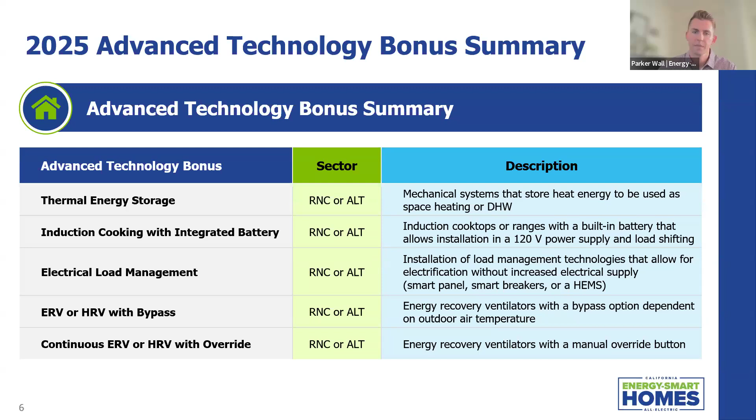These all have incentives that will be paid out on top of the base incentive for eligible equipment and eligible projects participating in Energy Smart Homes. The bonus incentives can be seen here. They vary from single-family lot to multifamily unit and ADUs. The ERVs and HRVs are only available for single-family or multifamily units, not in ADU.

If you have any questions, please reach out to your project representative, and we'd be happy to calculate what your incentive could be if you're considering installing some of these advanced technology bonuses or wondering if the equipment you're going to install will qualify. We'd be happy to sort that out for you and assist you in that process.

There is a note here: an additional bonus is available for projects keeping their panel at 100 amps or less and participating in the electrical load management advanced technology bonus. This bonus is paid out for projects that are electrifying their dwelling unit, ADU, or single family home without upgrading their electrical service. It's $1,000 per single family lot, and I believe $500 for multifamily unit and ADU.

That is shown on the screen, but that money is available for projects that are electrifying without upgrading their service. We are definitely interested in how these projects are achieving that—going forward with installing heat pumps and other electrical end uses without upgrading their electrical panels. It's good for the grid. It can avoid costs and also avoid additions to timeline and scheduling with upgrading the electrical service to the home. So we are providing an extra incentive for homes that are looking to electrify and keep their panel at 100 amps or less.

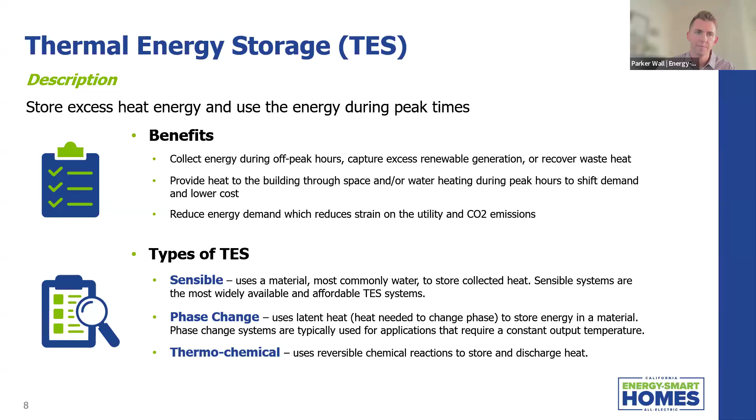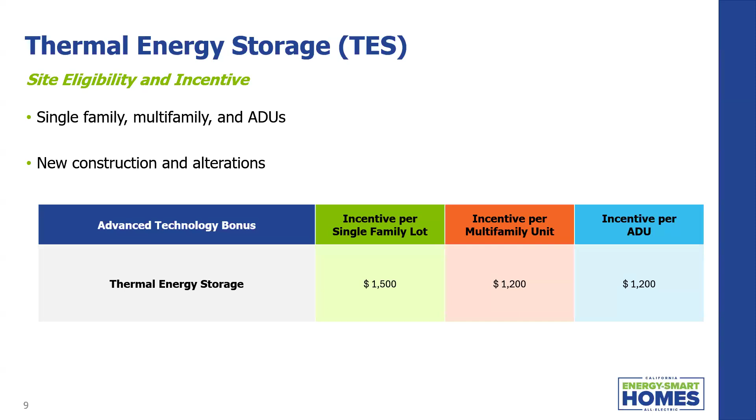Parker, we have a question. Will this TES Advanced Technology Bonus cover heat pump domestic hot water with hydronic space heating? Good question, that feeds in well to the next slide. Excellent, yes it does.

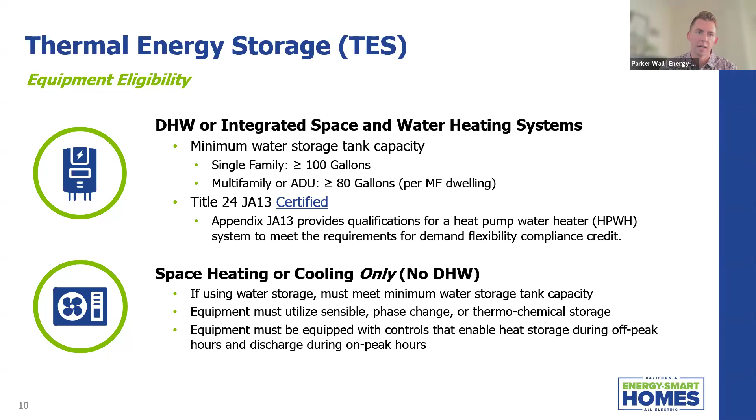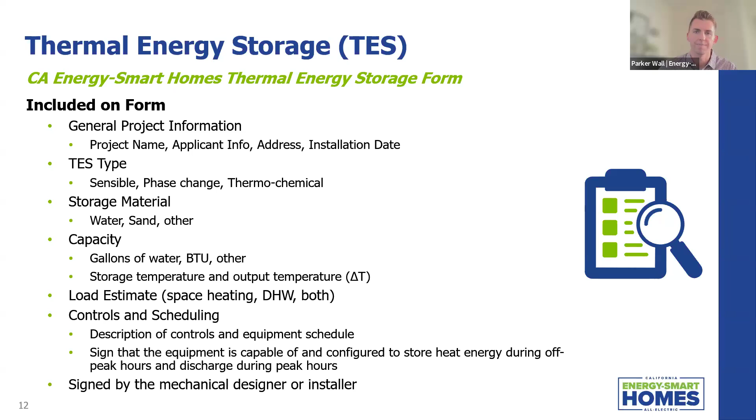So if you're interested to learn more, we'd be happy to connect you with some resources out there that have more information on this technology.

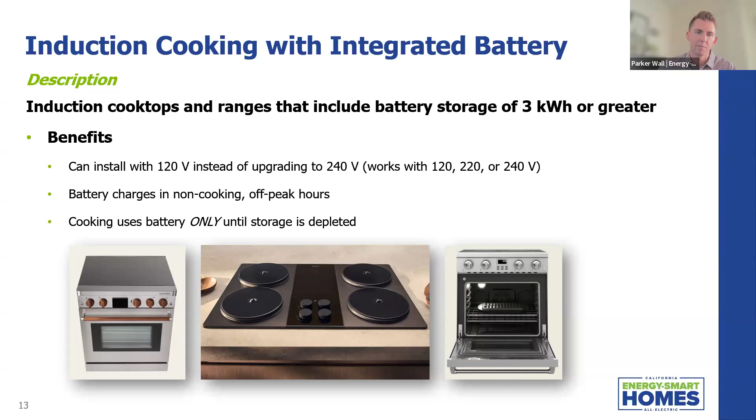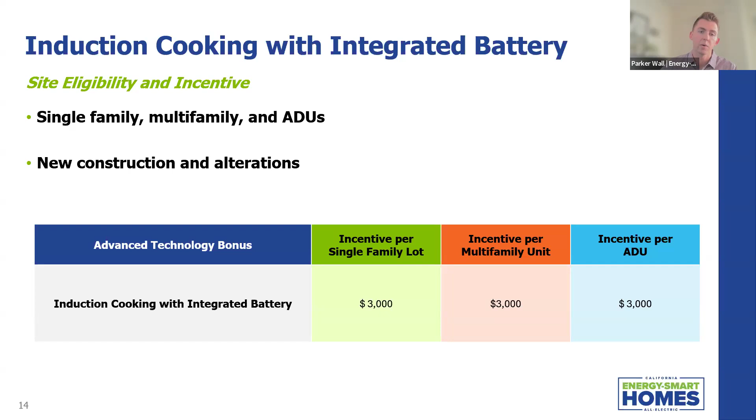Site eligibility incentives, again, eligible for single family, multifamily, and ADUs, and also eligible for new construction and alterations. Here's an overview of the incentive level: $3,000 per single family lot, multifamily unit, or ADU. So any project that applies and is eligible for Energy Smart Homes and installs one of these pieces of equipment can collect a $3,000 incentive toward this piece of equipment.

The eligibility: the equipment cooktop must use induction cooking technology only, and the equipment must contain an integrated battery with a minimum capacity of 3 kilowatt hours or greater.

The required documents to submit are a spec sheet for the installed equipment, a paid invoice, a picture of the installed equipment, and for alterations projects, indication of electrical service to the stove or range. This can be confirmed via the invoice or submitted email — we're just looking to confirm what voltage that outlet is so we understand what the stove will be running off of.

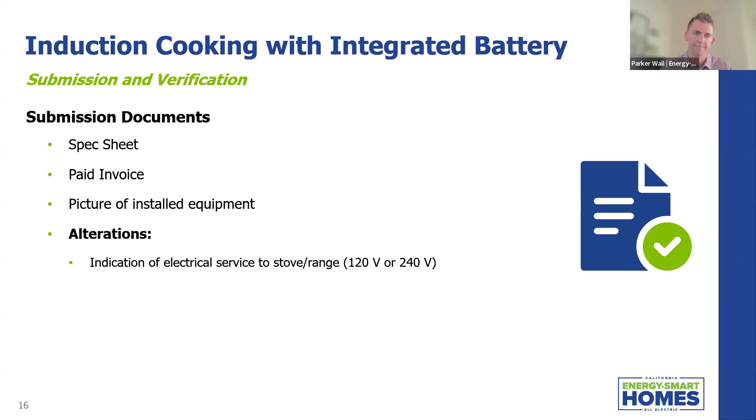Our next advanced technology bonus is electrical load management — installation of load management technology that allows for electrification without increased electrical supply. That can be a smart panel, a panel full of smart breakers, or a home energy management system. The benefits are they reduce electrical demand and reduce costs and strain on the grid.

They could potentially avoid an upgrade to the electrical service, which adds cost and time to an electrification project, and they also manage energy use to allow a homeowner or building owner to minimize monthly costs.

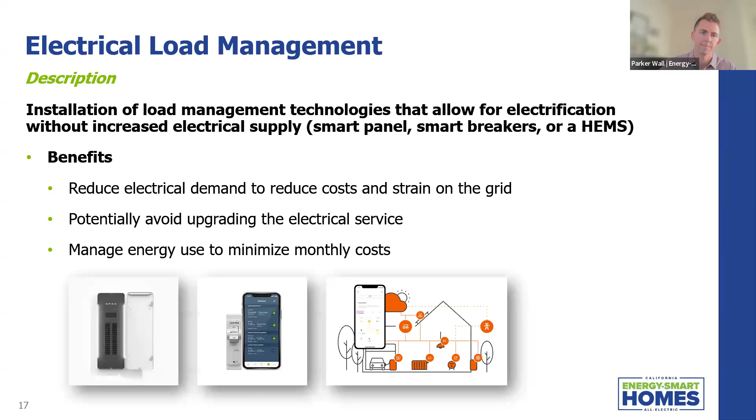The site eligibility incentives for this advanced electrical load management advanced technology bonus: again available for single family, multifamily, and ADUs, and new construction and alterations. It is $3,500 for a single family lot, multifamily unit, or ADU.

There is an additional incentive for alterations projects that are keeping the existing electrical service of 100 amps or less. That additional incentive is $1,000 per single family lot and $500 per multifamily unit or ADU. If you have any additional requests or information or any questions on that additional incentive or the electrical load management incentive or advanced technology bonus, I'd be happy to answer questions, whether in this call or after.

The equipment eligibility for electrical load management: projects applying for the load management advanced technology bonus must install a smart panel, a panel full of smart breakers, or a hardwired home energy management system with the ability to measure electrical usage at each circuit load in the home, control and schedule usage on or off from a user interface, typically a mobile device app, and integrate critical load management and backup power integration where applicable.

We are also requiring that alterations projects must complete and submit a residential service upgrade decision tool. Look for a training from Energy Smart Homes soon on how to complete that tool. What that tool essentially does is collect basic information on the home's existing end uses—laundry, heating, cooling, domestic hot water, cooking, etc.—and it estimates what the current load is.

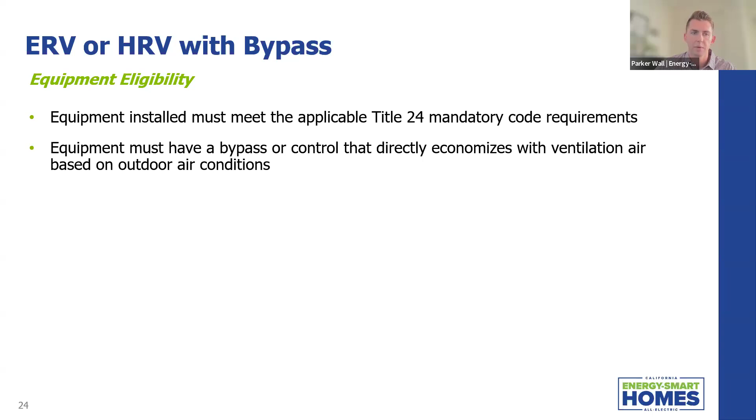Submission documents for this advanced technology bonus are as follows: a spec sheet for the installed ERV or HRV, a picture of the installed equipment, and a completed California Energy Smart Homes ERV or HRV with a bypass form. That form includes general project information: name, applicant information, address, installation date, the installed ERV or HRV model number, and the device type.

The device is typically controlled by fixed dry bulb, differential dry bulb, fixed enthalpy, or a combination of fixed dry bulb and enthalpy. Then there's the bypass temperature enthalpy limit, if available and set by the installer, or if installed and set by the manufacturer and included in the specs.

This entire form must be signed by the installer, verifying that the equipment is capable of and configured to bypass depending on outdoor air conditions. So if the manufacturer has preset controls, the installer would still sign the form confirming they're installing a system that meets the requirements of this advanced technology bonus and will be configured to bypass depending on outdoor air conditions.

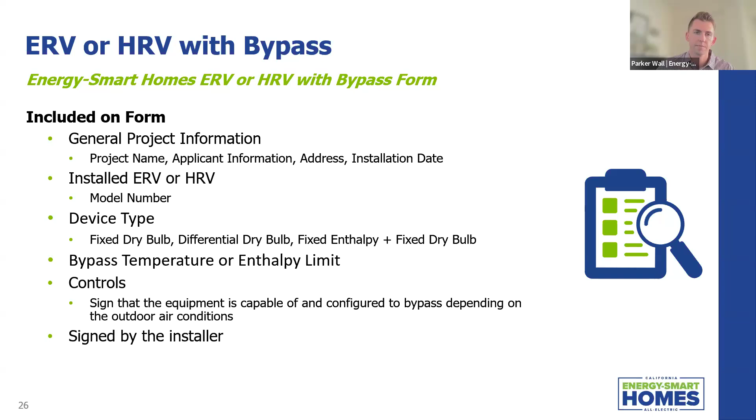Our fifth and final advanced technology bonus for today is the continuous ERV or HRV with an override. This is a heat recovery ventilator that operates continuously and has a manual override option allowing the occupant to turn the equipment off when air quality is poor.

The benefit of this system is it runs ventilation at all times to increase indoor air quality. However, it provides an override for ventilation when the outdoor air quality is poor and would affect the indoor air quality.

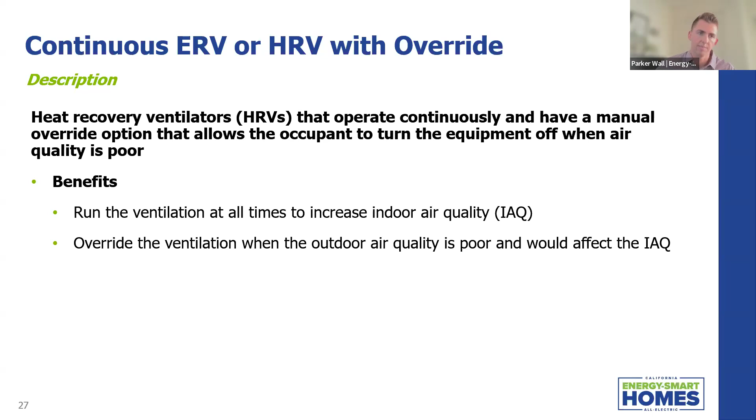Site eligibility and incentive are shown here: single family, multifamily low rise, no ADUs, and both new construction and alterations are eligible. It's $1,000 per single family lot and $500 per multifamily lot for this advanced technology bonus.

Equipment eligibility is as follows: the equipment installed must meet the applicable Title 24 mandatory code requirements for ERVs and HRVs, or any other regional or local codes, and the ERV or HRV must be configured to run continuously.

A manual on-off switch must be installed in the conditioned space or main electrical panel, displaying the following text or equivalent: 'This switch controls the indoor air quality ventilation for the home. Leave the switch in the on position at all times unless the outdoor air quality is very poor.'

This switch gives direction to the homeowner or occupant to properly ventilate the home and run the ERV or HRV continuously until they have an idea that the indoor or outdoor air quality is poor and would affect their indoor air quality, during times like a fire or a high pollution day. They're then able to turn that continuous ERV or HRV off.

Submission documents here: a spec sheet for the installed ERV or HRV, a picture of the installed equipment and the override switch—that override switch again must be located in the conditioned space or the main electrical panel—and a completed California Energy Smart Homes continuous ERV or HRV with an override form.

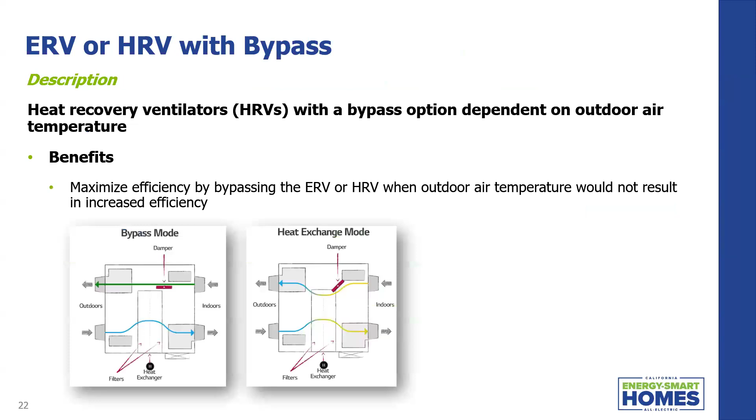Yes, so in that slide—I'll pull that back up—you can see filters here. The filters would filter both the stale air from indoors, to filter out anything in that air before it exchanges with the outdoor air coming in, and it also filters the outdoor air coming in before it enters the home. So typically there's a double filter on that. I could see there being just a single filter on the fresh air to the inside, because you don't necessarily need to filter it twice—the indoor air going out and the outdoor air coming in—but that would depend on the actual system itself.

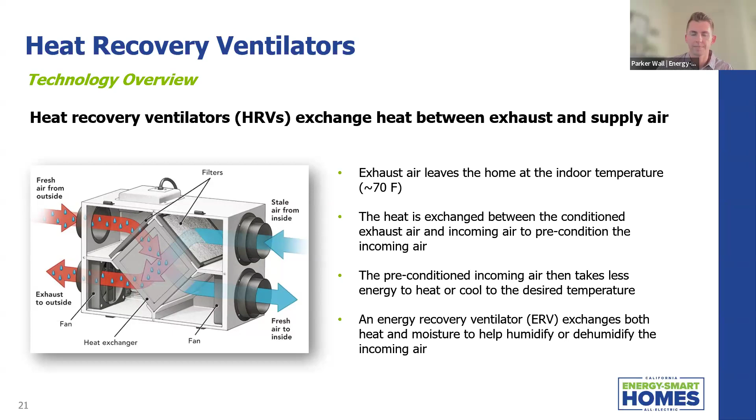All right, the next question is about an ERV manual override. One of our manufacturer partners is asking: their ERV manual override is integrated in our HVAC thermostat—would this qualify for the continuous ERV?

In the thermostat, that would be in a conditioned space. If they have some instruction on it, I think the equivalent text part of this would be the only part that they would need to add. It could probably be added at time of installation.

I'm assuming that thermostat is located in the conditioned space, as most thermostats are. So doing that would be a pretty easy addition to qualify for this. Thank you.

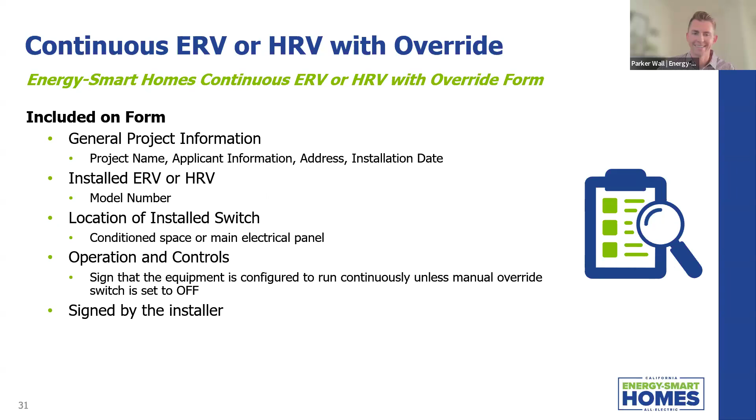Is that all of our questions, Melinda? That's all of our questions on HRV or ERVs for now. We'll hold for the rest of them. Yes, we have some more, but we'll wait.

I did want to touch quickly on the monitoring portion, because we touched on this earlier. The monitoring incentive is only paid if sites selected for monitoring and the project completes and signs a participation agreement. If the project is selected for monitoring after installation, they do have a chance to turn it down. If they are selected for monitoring, PG&E or a third-party contractor will be put in contact with the site owner. The participation agreement will be signed by the occupant or owner, and the third-party contractor will visit the site to assess and install monitoring equipment.

Potential monitoring equipment can include individual circuit monitors or smart panels, ultrasonic water consumption monitors for those advanced technology bonuses studying how much water is used, and enthalpy monitors and some other sensors, maybe comfort sensors around the home. The monitoring equipment will not be invasive, and it's really looking to just study how the equipment is used and how much energy it is using.

If you have questions on the monitoring process, we'd be happy to address those if you want to follow up after, and we can discuss those further. Again, just want to make sure everyone knows that applicants, project participants, do not need to go through monitoring. If they are selected, they have the ability to say no thank you. But we are happy to provide an extra inducement and cover them for their time spent dealing with the monitoring teams and allowing them to set up monitoring and monitor their systems.

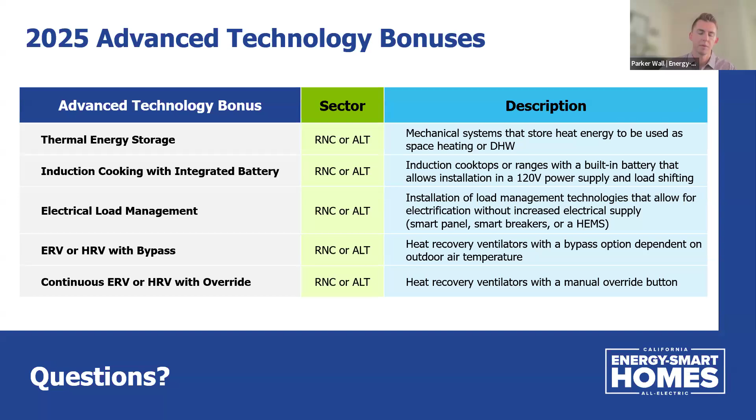Absolutely. The existing advanced technology bonuses are listed here, and they are remaining. We do not currently have a plan to remove any of these as of today. The existing ones, which rolled out in 2024 or before, are available and can stack with the new 2025 advanced technology bonuses.

These include variable capacity heat pumps without electric resistance, integrated heat pump space and water heating, low GWP heat pumps, passive house certification, heat pump pool and spa heaters, verified ACCA technical manuals, and central heat pump water heater design and installation.

One piece of technology that meets multiple advanced technology bonuses can collect the bonus incentive for each one it qualifies for. So if you're installing a low GWP integrated space and water heating variable capacity heat pump that has no electric resistance and also qualifies for thermal energy storage, you can stack all of those incentives on top of each other and collect a pretty good incentive for that advanced technology, a bit more than a typical system would cost. We're looking to incentivize these going forward and advance the market toward newer advanced technologies.

Great update, and we encourage it. Stack them all, take them all. Yeah, we want to see as many advanced technology bonuses collected as possible, and we want to see these come through the program. So definitely stack them all and take as much as you can get.

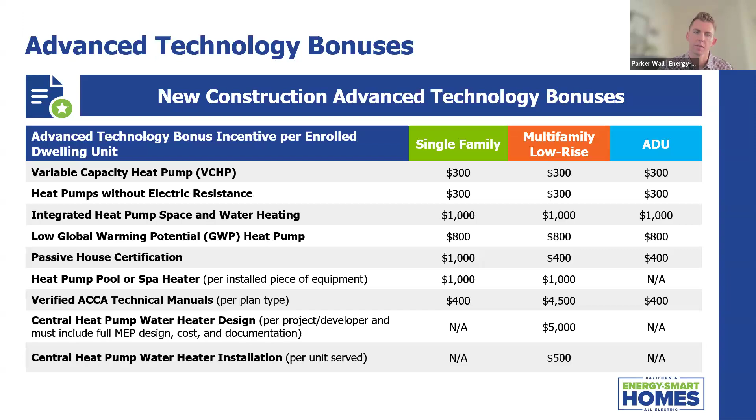Oh, we had just another question about these current bonuses you're sharing, Parker. So yes, these are still eligible and active. Yes, they are. Is that the question? Yeah, yeah, they are. These are the new construction available incentives, and then these are also the alterations. You can see for alterations, we currently do not have verified ACCA technical manuals or passive house certification, but the rest are available.

The next question is how long does a project have to complete installation? Good question. These incentives are currently available. Now completing installation varies from project to project. The incentive levels change towards the end of 2025, going into 2026. The base incentives do. So if you have a project that is completing this year, we'd love to get in contact as early as possible to try and get all the documents in line so we can get you the maximum incentive available and get that project through our pipeline as quickly as possible.

Fantastic, great. Yes, these slides and a copy of today's presentation will be available early next week on the resources page. We've had that question several times, so I definitely want to share that we are excited to continue to share this information with you and available for questions.